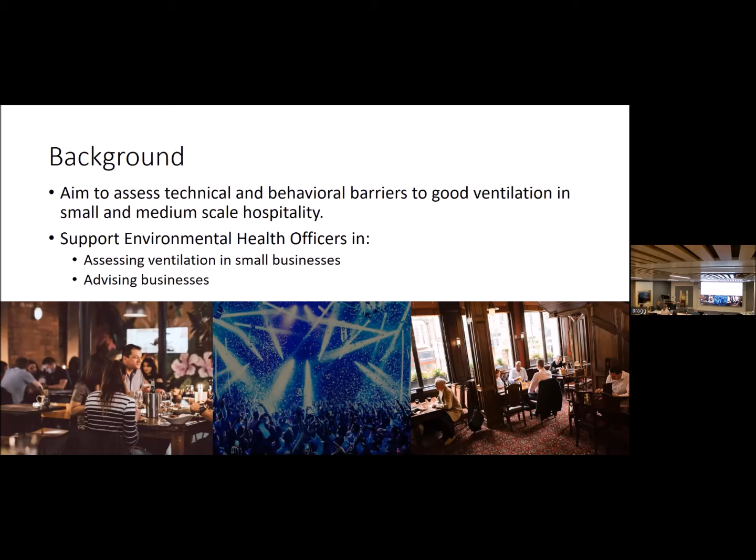So that's a lot of the driver behind what we're doing. We were doing walk-around surveys where we'd look at the ventilation provision, CO2 monitoring to understand that provision of outdoor air per person, and looked at whether we could calculate air change rates. I'll talk a bit about that. And then we had interviews. If you're into the psychology side of things, we were looking at the COM-B model, so the capabilities, opportunities and motivations for making those changes.

I've given an overview of the type of venues we're looking at - small to medium scale, so not a lot of prior work in this area. I think the biggest study around events and hospitality would be the Events Research Programme, but that was much bigger events. These are quite small scale. Our restaurants were mostly around 40 to 50 seats - that's the maximum capacity shown on the right. Our nightclubs were less than 2,000, whereas the one in the Events Research Programme was 6,000 - quite a different scale. So you're really looking at smaller scale businesses.

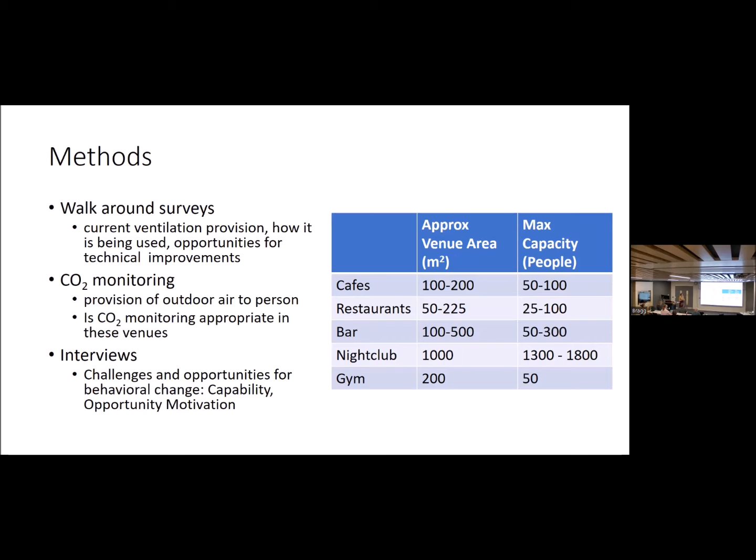Another point worth making is this work was done December to March, so Omicron hit just as we were starting. That was another challenge for these businesses who were already struggling - suddenly people were not necessarily wanting to go out, to keep people safe. So that's the maximum capacity of the venues, but in a lot of cases they were operating at lower capacity and had social distancing in place.

Just a quick note - the title was about ventilation rates, but I'm just showing CO2. We were considering how we could quickly gather occupancy data, because with a 4-month project we're trying to get a view of what the ventilation is like. Is it good, bad, really terrible? How worried should we be? So we're trying to look at a lot of venues.

Doing occupancy studies was something we had to write off. We did go in and do spot checks, which was fine in smaller venues like cafes and restaurants, but in a nightclub with 1,000 people, not possible. We hoped to gather information from the venues, who often said there was data available, but getting that out of them was basically impossible. So we did look a little at using Google Live occupancy data.

Google Live tells you how busy a venue is, and you have historic data with little charts telling you what it's like on different days of the week. It also sometimes has live data, showing whether it thinks it's busy or not. A methodological point of interest is that we found this could actually work quite well in some cases to give us a sense of how busy places were - it tells you how busy a venue is as a proportion of its maximum capacity.

So you need that maximum capacity from the venue owners, but you also need to know what it's been recently, because that maximum is based on their data, so it will reset every couple of weeks. In our case, with everything operating at lower capacity, you'd have to use that number. What these charts show is our CO2 readings, with the blue bars showing when the venue's open, from 0 to 100%.

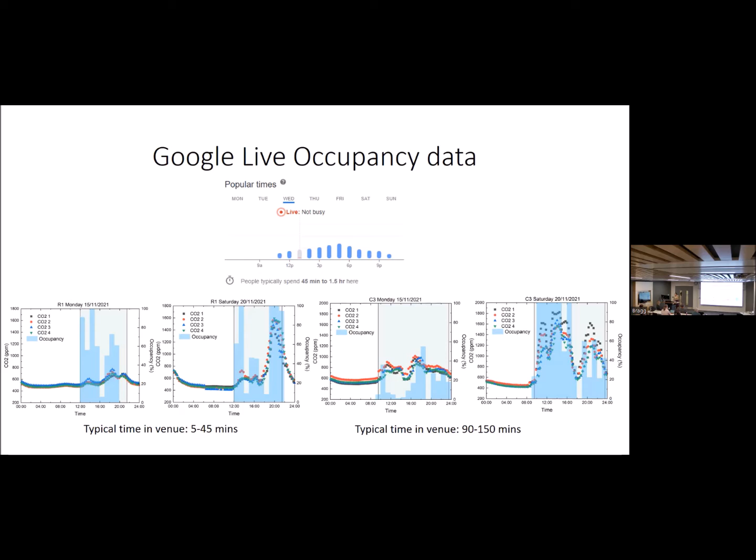So moving on to what we saw in terms of the ventilation in these venues. We looked at 21 different venues, and they're not all shown here - they'll be shown on the other chart. There were restaurants, cafes, bars, nightclubs, and gyms. I haven't shown gyms on this just because of space, and I thought I'd stick to that more. Actually, what's really hospitality - that's another story of why we included gyms.

So it's the first time I've shown this chart in public, and I'm hoping it's going to make sense to people. We've got each listed restaurant along here, cafes, bars, and nightclubs. A block is one venue - so one venue, different venue, different venue. We've got 7 restaurants there. Each line is a day in that venue, and that is a day that they are open, so that represents the opening time. This is only data when the venues were open.

Something we struggled with in trying to interpret this data is that some venues would be open a lot of the week, some venues would be open only for short periods. Trying to look at how do we bring this data together, particularly if you're looking at averaging - max only gives us the maximum, average even if it's over opening time. In some places it might have really bad ventilation, but it's only at capacity for one night of the week, but it's open all the time with barely anyone in there. So getting that balance is quite tricky.

So that's the aim of this visualization, is to understand this a bit more. This is the time that it's open on those days, which is why some of them have more bars and others are just open more in our study period. What the colours are showing is where it's green - that's the percentage of opening hours under 800 parts per million. We're looking at the SAGE guidance and what we should be aiming for.

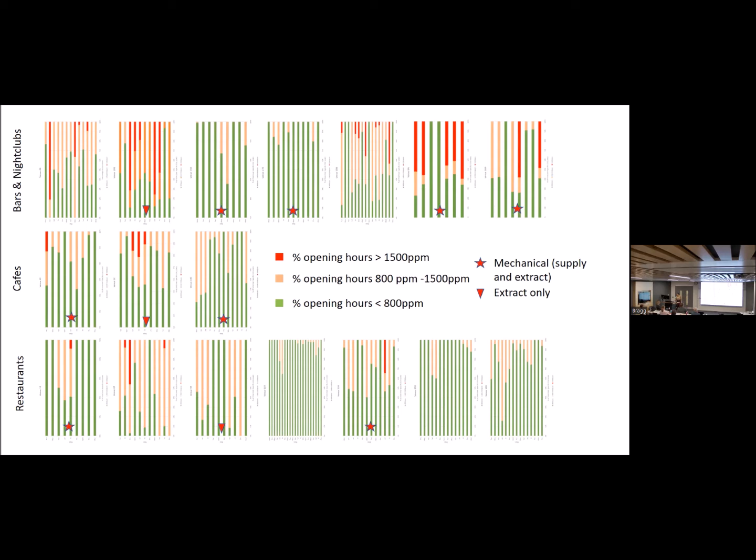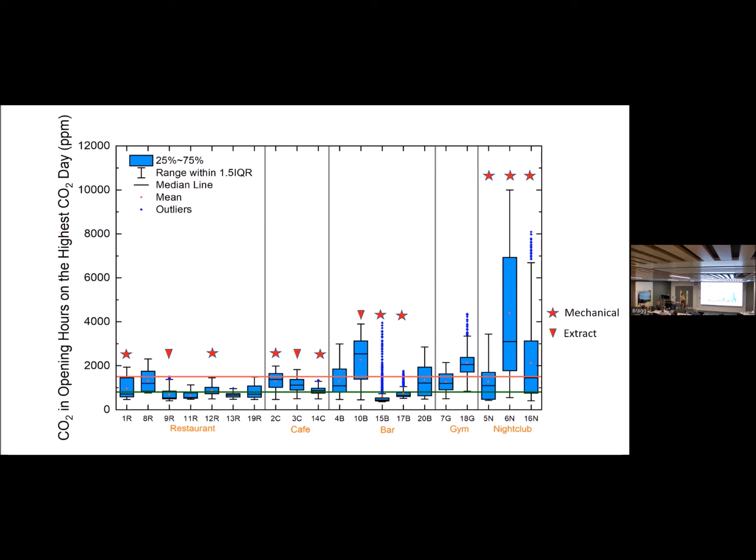Just to look at the data a bit more, this was the worst day, so again trying to look at how we compare over time shows a similar sort of data. Some values getting very high in the nightclubs. The one that goes up to 10,000, we do suspect there might be an issue there with something else happening in the space that isn't people's breath. We've been digging into this, trying to figure out what's going on, but haven't quite got an answer yet. Having seen the systems in the place, that's surprising. We'd have expected it to be more alongside the other ones, so maybe up to the sort of 3,000 to 5,000, but that seems pretty high to get up to 10,000.

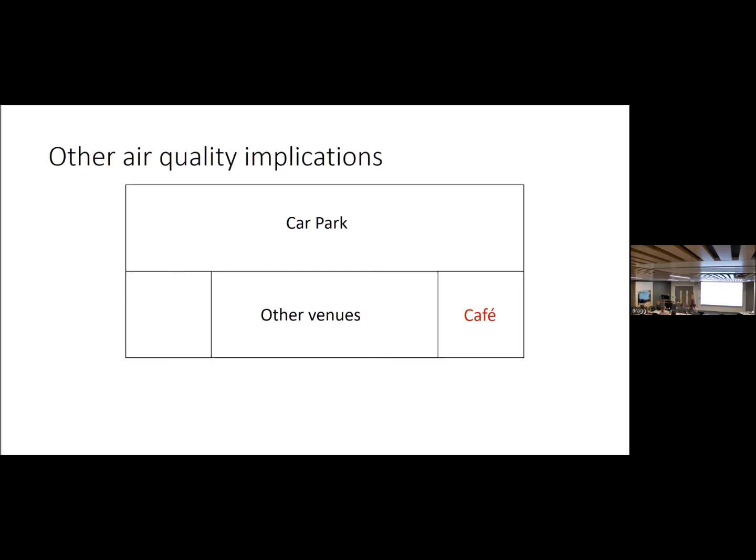Other air quality implications of places came up with quite interesting things. One of our early venues was a cafe, and this is my attempt of drawing a plan view of the building, which is a city centre multi-storey car park, with retail outlets around the base. We looked at a cafe on the corner to start with, and there were some other venues along the side of it which didn't pay much attention to, as they weren't interested in our study.

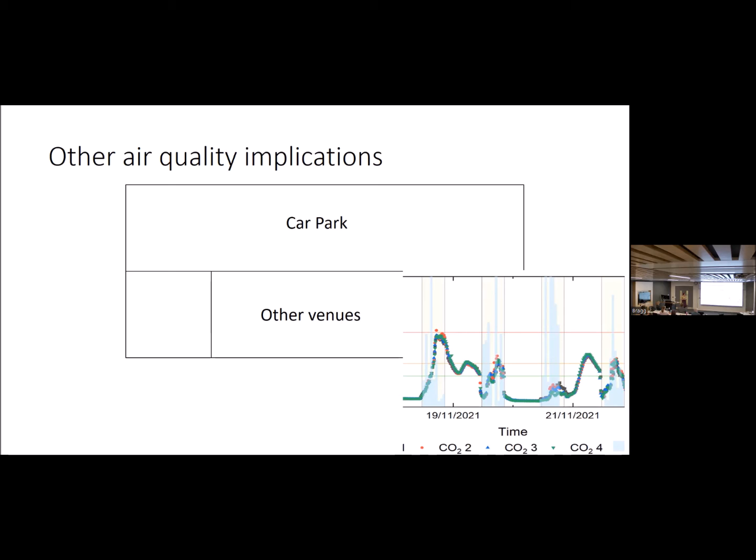You don't need to look at this plot in detail, but what we found was that we were getting some peaks in the night, and we thought, oh, that's interesting. We gave everyone feedback sheets. So in this one we said, you might want to just check everything in your kitchen, maybe something's switching on that's creating CO2, and maybe just check nothing's malfunctioning. I'm not sure what that is.

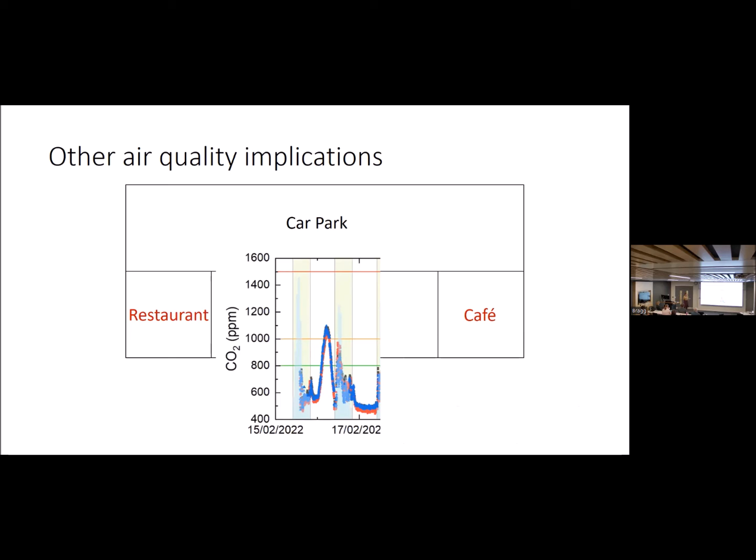And then a later venue was on the other side. Again, this one really got the peaks in the middle of the night, 3am, always the highest values. I was like, well, is this, it's a daytime restaurant. Are they doing nighttime meals on the side that we shouldn't know about? Are they not within their license? What's happening? And the researcher figured it out: there's a nightclub between these two. There's a smoking area from the nightclub within this car park area, and we're pretty sure there's an exchange of air between these different venues, and we expect that's what the high levels in the cafe was.

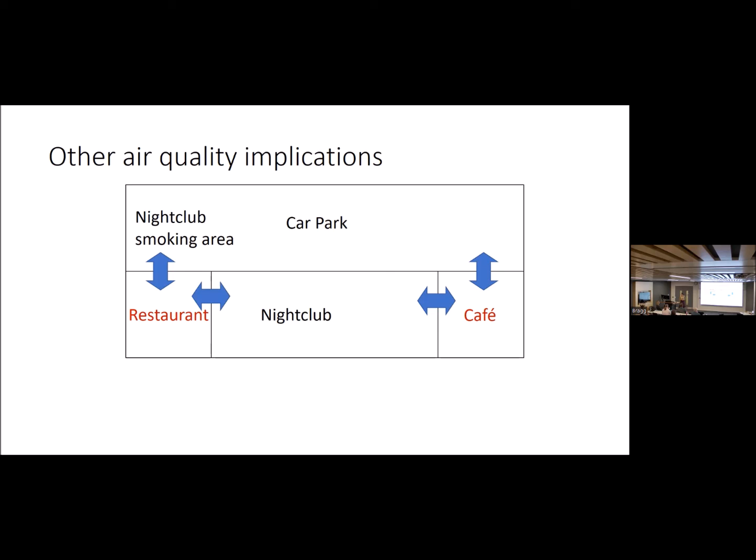Just to give an overview of some of our typical recommendations to the owners in these places: in any case where there's a system, the extracts in particular often weren't really working. In one case, I didn't know where the on switch was. That really wasn't working.

Our first advice was basically to get an engineer in to review the system, see if anything needed an upgrade, and to then make sure they're implementing clear maintenance regimes and a clear plan of operation.

One of the venues, a very keen guy owning it, knew it was really important to look at ventilation. We turned up when he was in business, people sat down eating, and said, so what's your current ventilation? He said, oh, do you want me to switch it on? Well, yes, I think that would be our first advice: have this switched on when you're in the space. That was clear across a few spaces where they were only using it occasionally.

It's interesting, we commented about CO2 monitors earlier from Tim. We actually felt that where CO2 monitors would be useful here would be in a lot of the naturally ventilated spaces which are doing quite well, to help them manage thermal comfort and know so they weren't having to over-ventilate, particularly as we move into winter, so they know what they're achieving. We did speak to some venues who had CO2 monitors who said, well, it's fine, but it tells me it's really bad and I don't know what to do. I think particularly with the bars, the problem is they can't do anything.

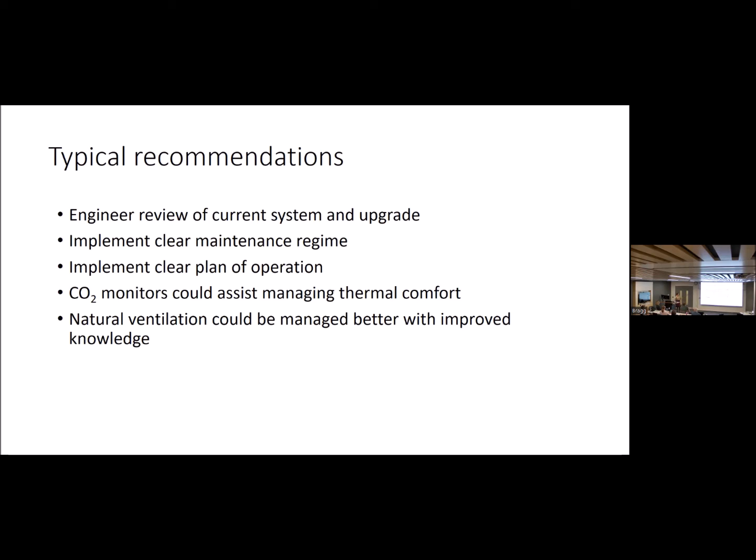Oops, that's on the wrong way.

Just a quick thing about barriers, because Henry's sitting on the edge of his seat. Anyone coming next week, Sophie's going to talk more about this, but we did find that there's a complete lack of useful guidance for these people. Anyone that's seen it, any guidance, felt it wasn't appropriate for them. They weren't able to make changes because of money or responsibility. And ventilation was only really a priority when it was a priority for their customers, and in most places, noise legislation was a higher priority.

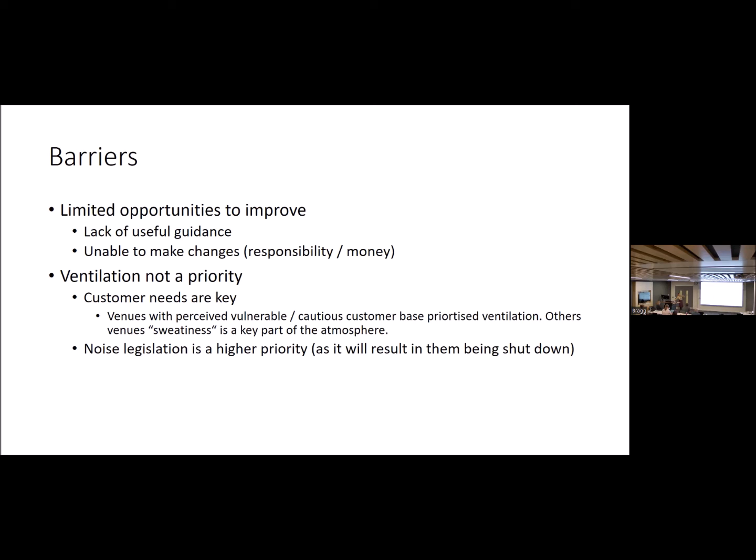So where people perceived that they had a vulnerable customer base who wanted higher ventilation, then they ventilated. For many of our venues, having atmospheric smoke was important, and also for some of the punkier venues with the gigs, being sweaty is a part of that experience, and they didn't want to remove it.

So thank you very much for listening. I'll leave the summary up there. It's overrun.

Love the idea of you walking around punky venues with your CO2 monitors. Does anyone have any questions for Abigail? Or a lot? Well, I think we'll just take one.

Tim: Thanks, Abigail, really interesting. So yeah, I'm interested in this potential movement between venues. We've seen that elsewhere. One of the projects we're working on at the moment, we're actually trying to make a retrofit, and it's been virtually impossible to seal between the places. That's a real challenge.

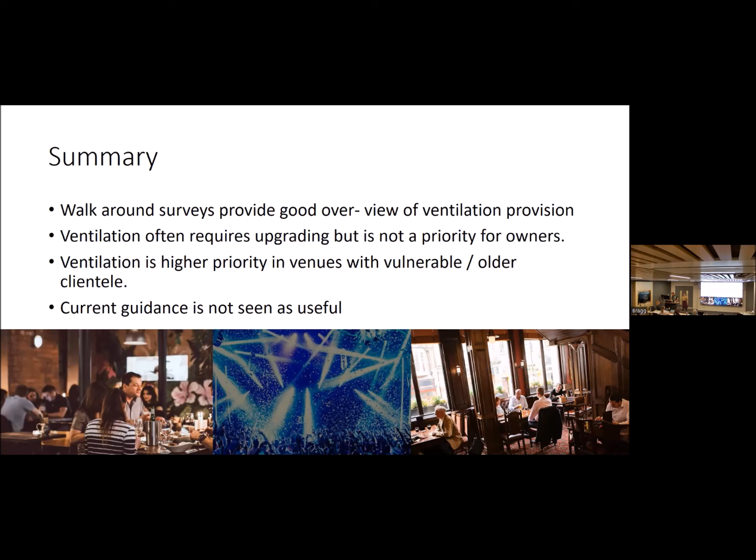I'm wondering if there are some things to do with the characteristics of that space which is driving it—so if you've got increased temperature, moisture, pressure, that's the driver to move air between these. The question is about drivers of the sort of incidental airflows between adjacent spaces. I'd say we don't have enough information here to characterise that fully, because we don't have anything from that—the car parking space and the nightclub—to understand that. We do know that in the cafe, the pressurisation was off with the ventilation, so it was very much positively pulling things through when it was on. So that was something that was ventilated well, but it wasn't very well balanced. It needed tweaking, so it was getting a lot of air through. So I think there you could imagine that it would be sucking things in.